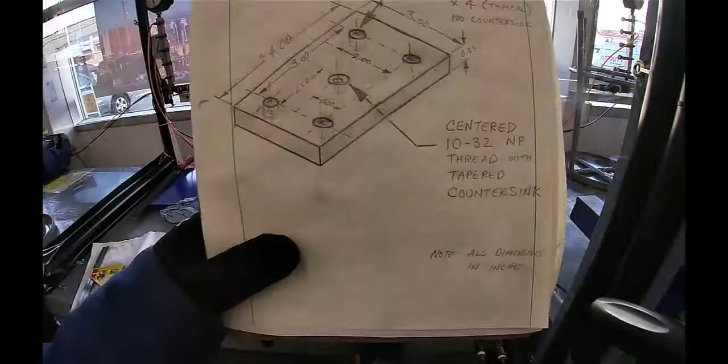Our little tap and drill project, which is right here. You can get a copy of that on the Learning Hub, and it's got some dimensions on there. One thing I wanted to point out on the dimensions over here is that this one right here where it says 4 inches, that's approximately 4 inches. Yours might not be exactly 4 inches when you get it. So unless you got a metal stretcher and it's less than 4 inches, you might have to do some calculation

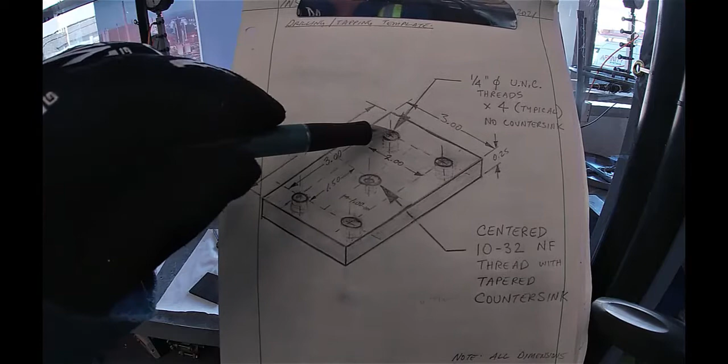on here. But the center holes, this is going to be centered right on that 4 inches over here. And these ones over here, there's going to be 3 inch from center to center for these bigger holes right here, here, and here. 3 inches center to center this way, and 2 inches this way.

Is that the red? Yeah. Alright, so we've got our piece ready. We're going to put a little bit of bluing paint on it. We're just going to put a light coat of bluing paint. Now, are we going to be okay painting onto that in the vise? Probably not, eh? Let's do it on a piece of paper.

Okay, so now Ray's getting ready to make his scribe marks onto our piece that we're going to be drilling and tapping. Alright, so he's got a dimension on the caliper on there. Yep. So we're going to try and get 0.459 on our caliper. 0.459 inches. Right. So right now we got 0.458. Looks pretty good. And then we're going to go scribe that onto right there somewhere.

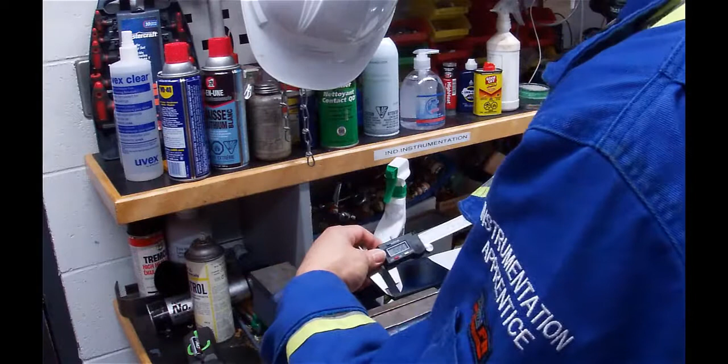I don't know if I can zoom. There we go. Okay, that's not too bad for a zoom. We'll do the same for this corner, because that's the same. And then same for this one. How come it stopped? Okay, there we go. No, it's good. It's still good. The time's still ticking. Okay. One more here.

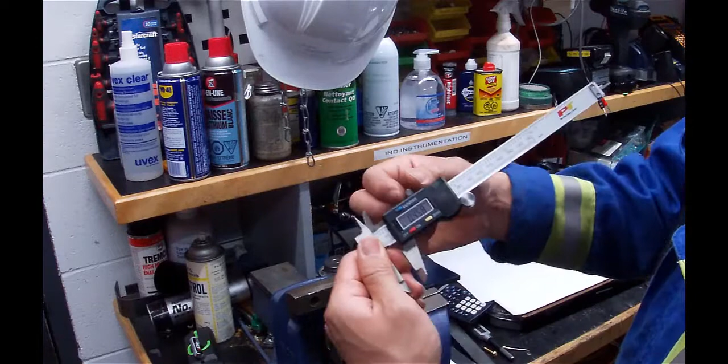Okay. All right. And we're going to set this other one up for 49. We got to unlock it here. And we're going to go to 0.4965. Oh, missed it. 49. Okay. There we go. Bang on. Look at that. Lock it in. Fancy schmancy. Lock the second mark.

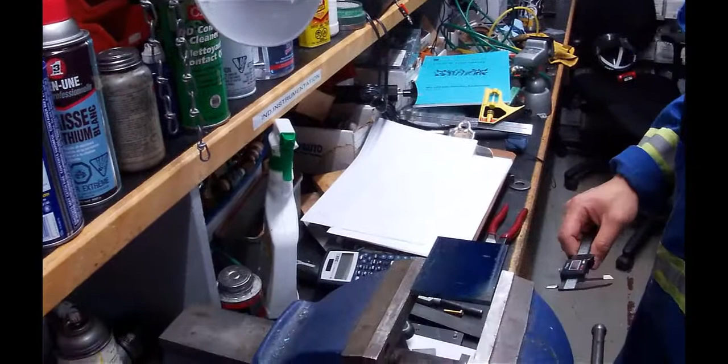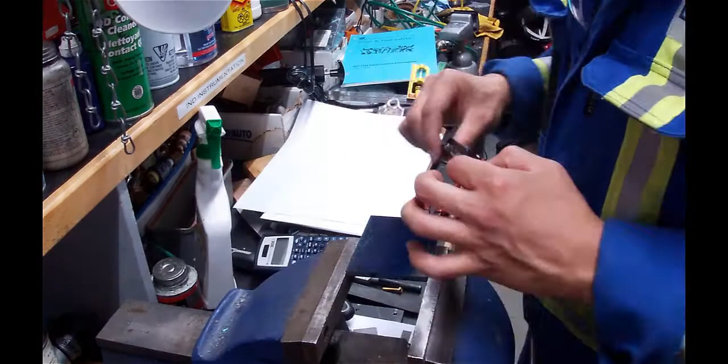So that's where our... now once we get that, center punch it. Got a straight edge? Actually, yeah, I can straight edge. Maybe use a straight. It's gonna be hard to get the exact measurement of this, because my vernier caliper is kind of on an angle. You know what I mean? Well, can I make a suggestion? Yep. All right. No, I think that's good. 496 right there. Okay. Double check it with our caliper. That's right.

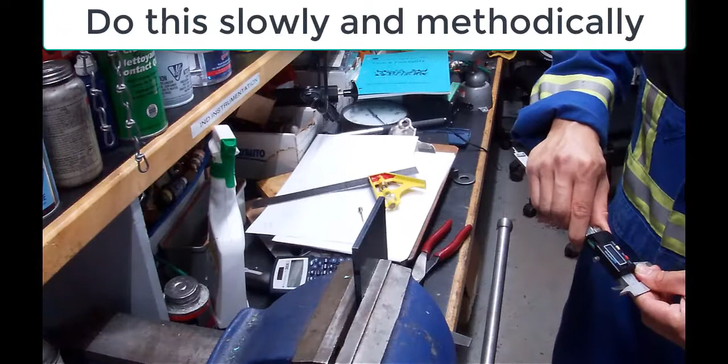That's too much. Lock it in. Yep, pretty much. It's good. Oh yeah, measure twice, cut once, right? Stick our square on there. Yeah, ready. First scribe of the day. Beautiful. Oh, look at that. It looks very good. Maybe you can do that to the other ones as well, right? Let's do it again. One more time. Yeah, make sure it's nice and visible. Yes.

Look at that. What a line. Beautiful. That is the best scribe I've seen today. Yes, look at that line. I know. Nice and visible. Very. So I guess you got a good mark on that thing now. So now we're going to flip it around and then do the same thing on this side.

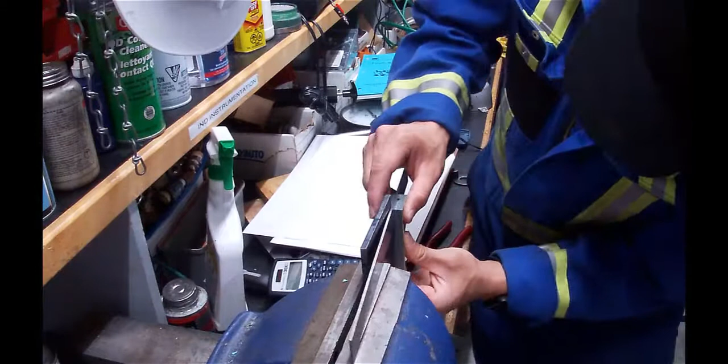Getting on. So now we're going to do our second scribe. If I hold it. Just try to help you hold the other end without putting too much pressure on it. Okay, ready. Look at that. Oh, that's beautiful. That looks good. 2 scribe marks. It doesn't look even, but it looks okay. Yeah, that looks okay. You could measure it, right? We could test it later, but maybe keep making your marks.

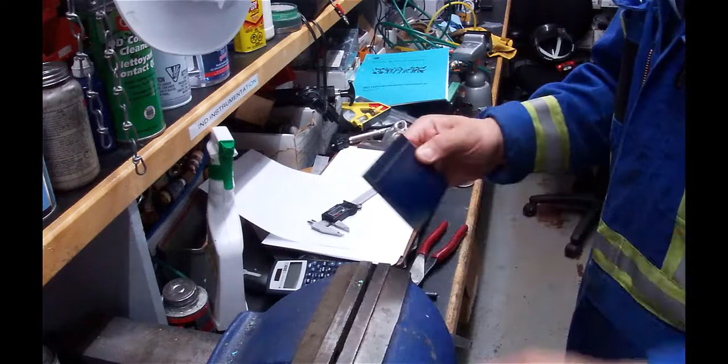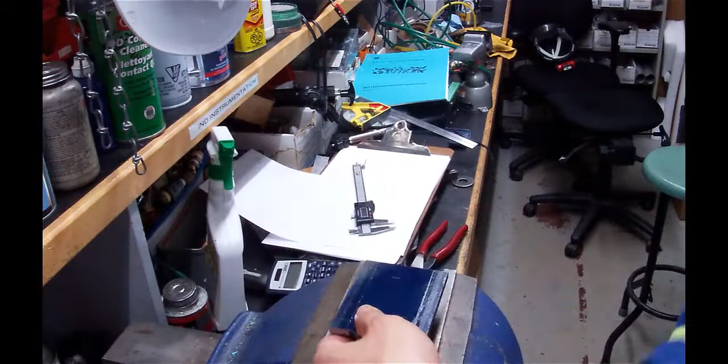How's it looking there? Pretty good. Wow. Getting our 4th scribe mark, and then we're ready. All right, then we can start. Then you're gonna do like the center point as well, right? Yes. We're gonna go to the center punch after that. So now we've got those lines lined up. I won't even use a square, so I'm not sure if it's actually square. So put it back in the vise. Four marks.

There we go. Scribe. Just double check this one here. So we're gonna go 0.4965. This marker here. Looks good. This mark that's touched.

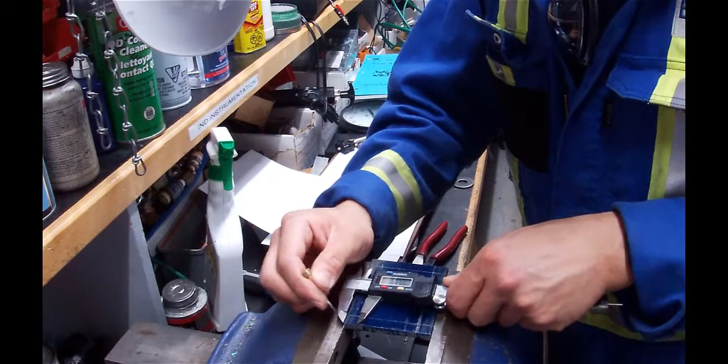Okay, so the only thing we're missing for a mark on there is our center point. So if this was 3 inches this way and 2 inches that way, where would the center line be between those 2 points? I guess you could take a line and scribe a line going from point to point this way and point to point that way, figure out where the intersection is, and then measure, and it should be halfway between here and here, and also halfway, in theory, right?

Yeah. So that should be 3 inches, right? That 3 inches? Slightly bigger, 3 point. Okay. Three point 3.01. 3.01. That's within like 100th of an inch. That's not too bad. Okay, so 2.001. Slightly off. Good thing we're double checking.

Well, remember that one of those lines is out, right? Did you measure to the right line? It's out by a difference of about a millimeter, because I made two etches on this side right over here. Do you see that? Yeah. Right. So you maybe want to make sure you got it on the right line. Where's your other one? No, this one's 2 bang on.

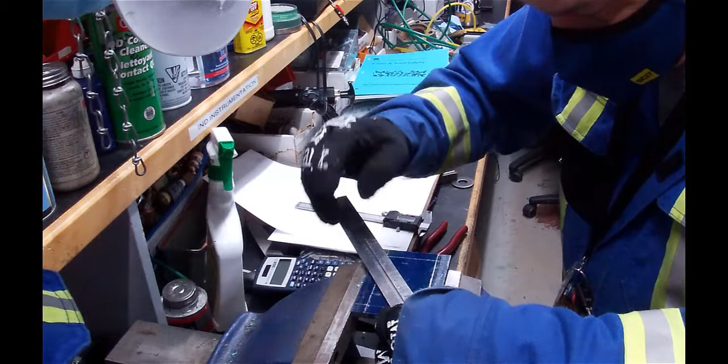The top one. Yeah, that one. Yep. Excuse me. Top to you, bottom to me. Bottom to me, top to you. Does that look good? Yeah, that's good. That's perfect.

All right, so now I've got a point right there. We should be able to measure that, and it should be 1 inch between there and there, and 1 inch between there and there, and then 2 inches, or no, inch and a half. Inch and a half, sorry. And that way we know that we're at center. I think I'm on the right line there. Does that look good to you?

About an inch. Okay, let's see. Oh, it's 0.9. I can see. So that's about 0.979 right there. Yep. Okay, and then this one right here. Which also, it's not quite. Nope. Not quite. Okay, so there's 0.99 between that line there. Oh, see, I think it's out. It is out.

Okay. Well, it's a good thing that we're only scribing so far, because that's really, really bad. You'd have been out by a whole millimeter. So, I think it's this. That's what it is. Probably the thickness of the scribe. It's out by, what was it, 0.0. Okay, you see the second mark that I've got in there? Okay. So I'm going to measure to that.

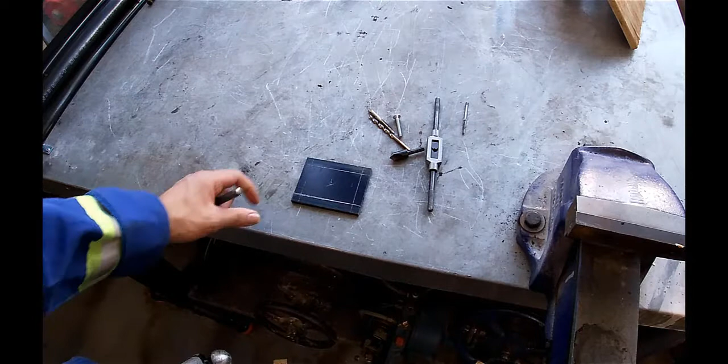So we're going to center punch this now. This is a center punch right here. We're going to take a ball peen hammer. So make sure you eyeball it really, really close first, right? Make sure that the point is right on the intersection, because you don't get a second chance with this. And hit it nice and clean and square, right?

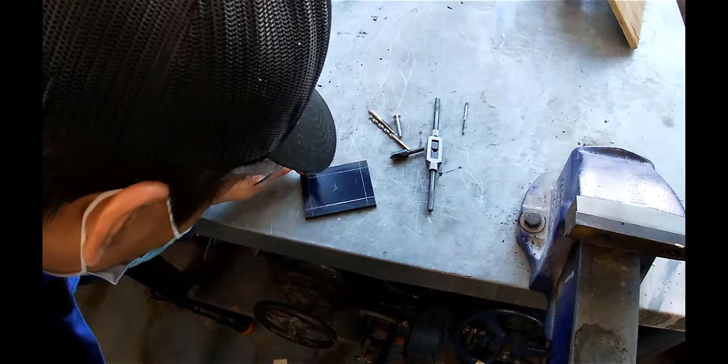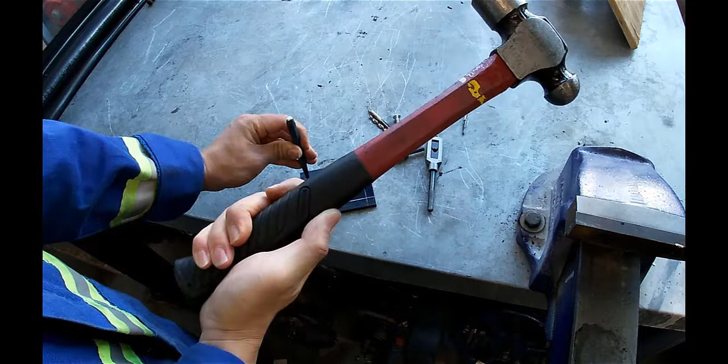Don't just go tap, tap. One tap, and done, right? You got a good solid ball peen hammer, which is the right tool, not a carpenter kind of hammer. And yeah, give it a good smack, right? Ready? Watch your fingers, of course. There, that's good. What's bad is if somebody goes tap, tap, tap, because then you make a whole bunch of holes in it, right? Okay, that looks good. All right, so let's do the other 4.

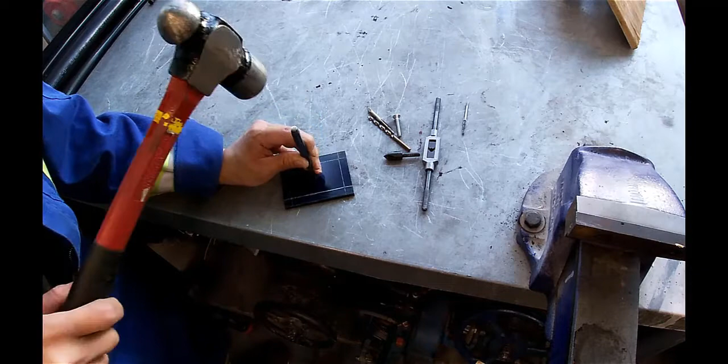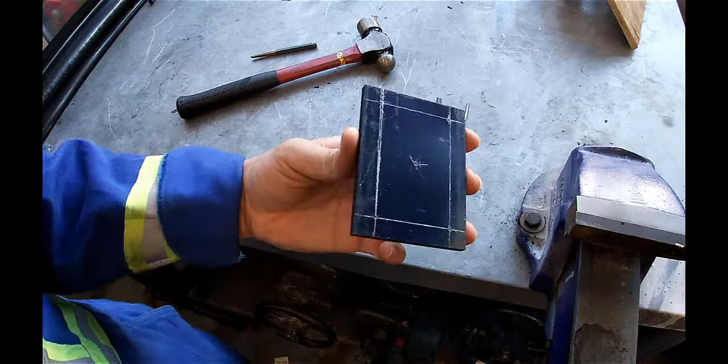Center one too while you're at it. We do that one. There we go. Okay, that looks really good. So, I guess now you can start drilling, eh? So, what size holes do you need? You need like 7/16. You went and looked at the index, right? And you figured out for the 1/4 inch NC you needed a 7/16 drill bit.

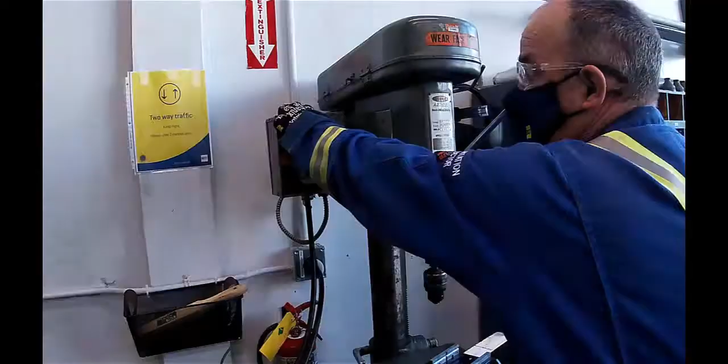Okay, first thing we're going to do is plug it in. It's one of these fancy little sockets on here. Comes in over here. And then once you put it into the socket, you give it a little twist, and then it shouldn't pull out. Okay, that's good. Now, we're going to put a bit into the chuck, but before I put a bit into the chuck, I'm actually going to pull the plug out because I don't want to take that chance, right?

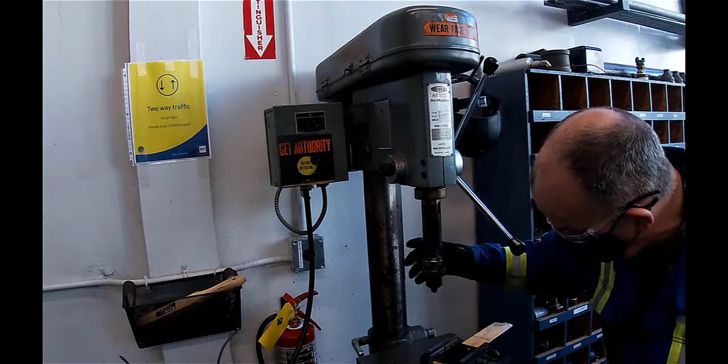Okay, so what bits do I need? We need a 7/16 for the first one, right? 7/32. But are we going to start with a 7/32? Don't we want to have a smaller bit as a pilot hole? We want to drill a pilot hole, so we have a smaller bit. Where's our chuck key? Oh, it's right here.

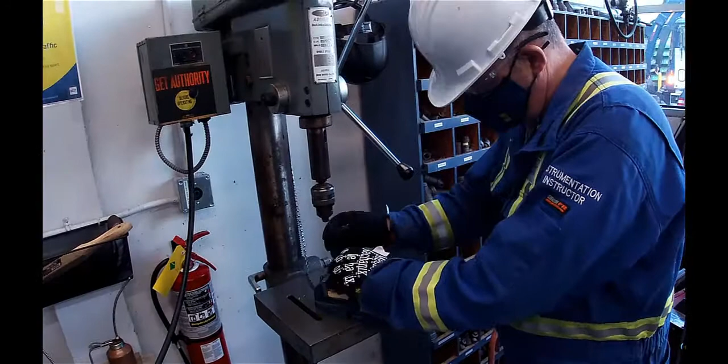And here's our chuck. Putting that bit on there. Spin it around a little bit before I tighten it up. Make sure that it's in straight. Grab my chuck key. Notice it's not plugged in, so I don't get into trouble here. Okay. So now, that looks pretty good. Am I at the right height? Am I going to be able to get all the way through my piece with this setting? That looks pretty good.

So what we need to do now is line it up. Now, what did you say? It was the one on the right, right? This now would be on your left. The one on the left, if you're looking at it this way now. Okay, the one on my left. On your left. Okay. Yep, no.

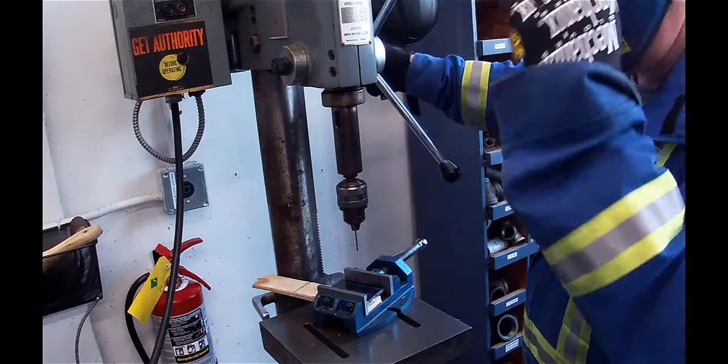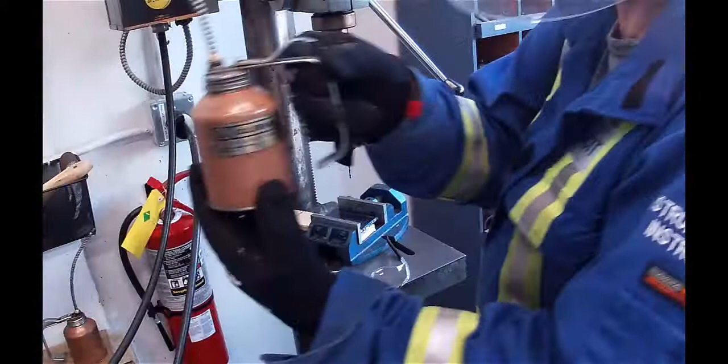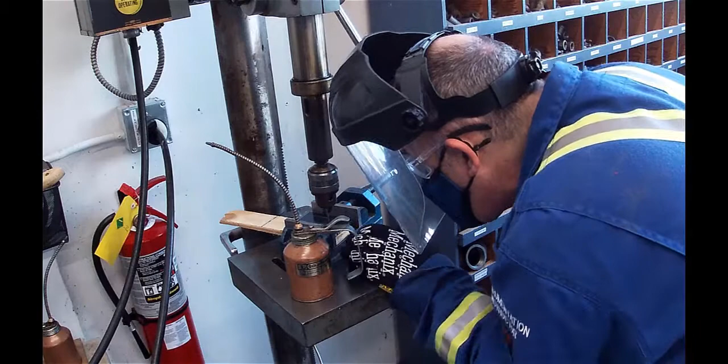Okay, so I'm going to plug this in. Plug it in like this. Got my cutting oil, right? Cutting oil. Okay, safety glasses. I'm going to put them on right here. And now, how do I turn this thing on? I have to make sure first of all that I'm still lined up. The nice thing about the center punch idea that we just did: if you drill a hole without doing a center punch, it's not going to go in the right spot. And like Ray was saying earlier, measure twice, cut once, right? Yes, always.

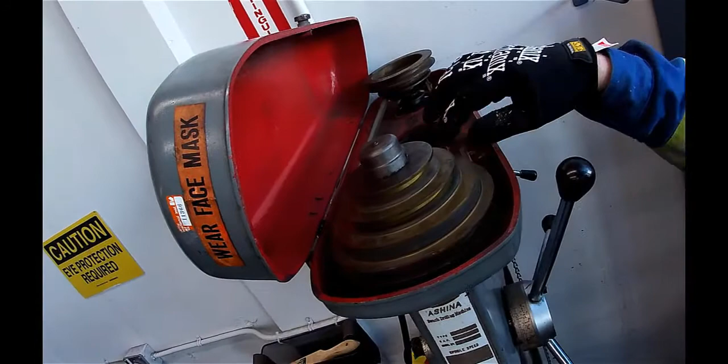I'm just going to put a little bit of oil on there. It's probably a little bit too much oil. And here we go, start. Looks like we've got about the right speed in there. Maybe we should show the folks at home. How do you change the speed on here? Again, always unplug it before you do that. Right up here. If I wanted to go faster, for instance, I would move this belt up here like this, all the way to the top, and then this belt over here to the top as well.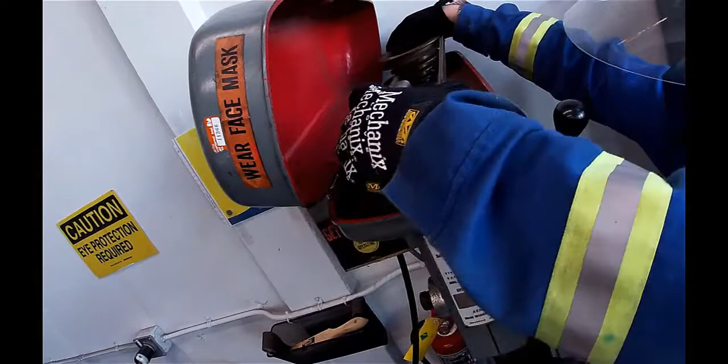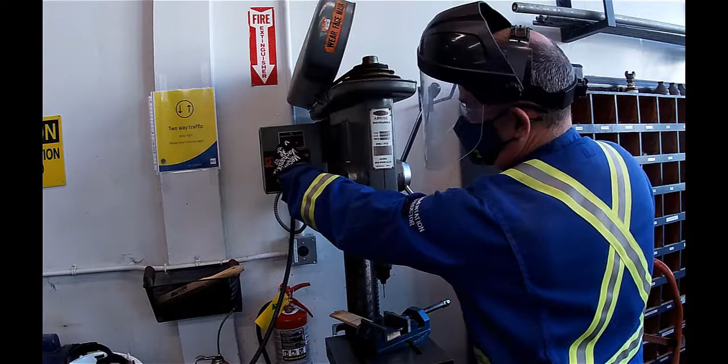How does that make it faster? For probably every one revolution on this side, it's going to spin 4 times on this side over here, or maybe it's 2 to 1. I don't know, I'd have to do the math. So let's just check that out. Is it going to go faster or slower? It's not going to go very fast at all until I plug it in. Alright, so now, with this guard down, let's take a look. You can see it's going a lot faster. Okay, so I'm going to put it back. I don't want to go that fast.

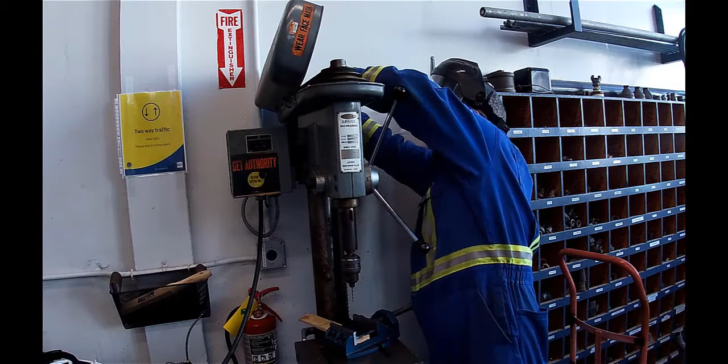Why did I put the guard down before I turned it on? Because what happens if that belt broke off right then and there? It probably would have smacked me in the head. Again, I'm just going to put the belt back. You don't have to take the belt right off to do this. Just go one pulley at a time. And then it goes back onto here. Let's go one at a time. Dummy. There we go. Sometimes it takes a minute. Okay, that looks pretty good. The belt's on both sides. The belt condition seems to be okay.

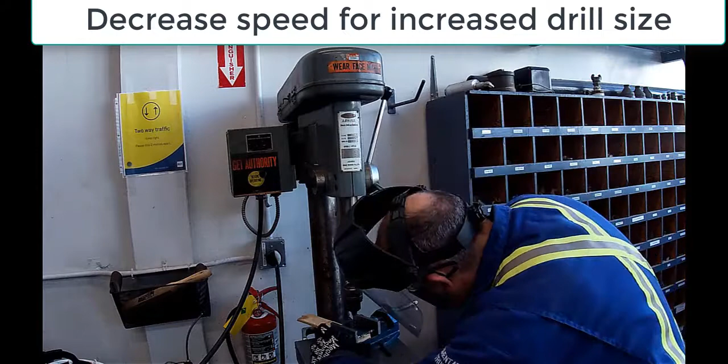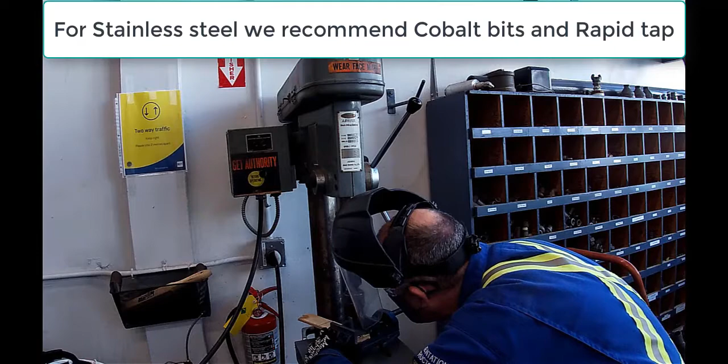So now I should be able to start it. And it's not going too fast. See, if it's going too fast, I'll probably break the bit, and I don't want to do that because then I'll be here all day. Okay, we go in kind of slow. I don't want to go too fast. Let the drill bit do the work, right?

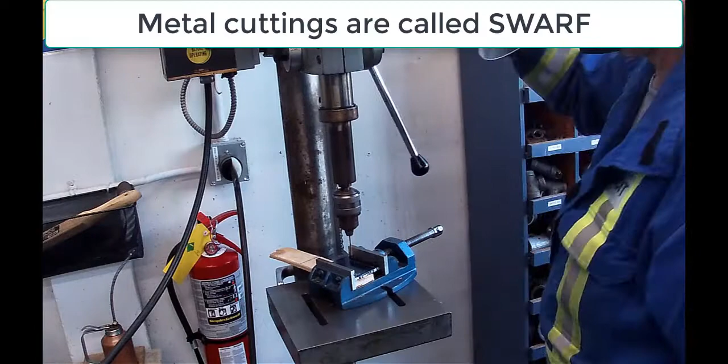I know I'm through when all of a sudden wood chips start coming up. There we go. See, I'm all the way through. You can see wood chips on it. All right, I'm going to stop it. See if I can clean that up a little bit. And that looks pretty good. I'm just tightening this a little bit. There you go.

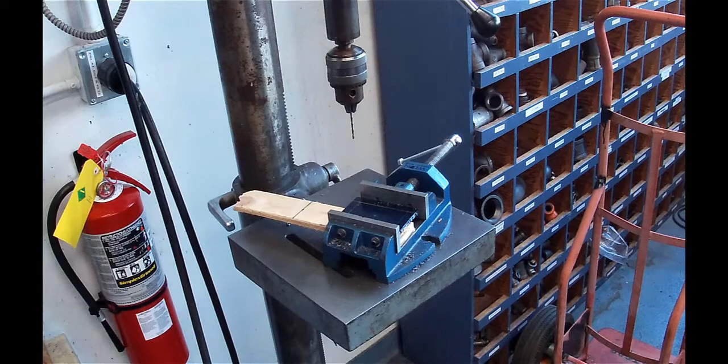Okay, so you got your own fancy face shield. Yeah, I forgot I had these ones. Those are better. Yeah, that one is pretty scratched. What's the matter? You don't like the way the platform is set up? It's a little bit low. Wow, I like it a bit high. Well, I am shorter than you. I'm closer to the ground. Yeah, I got it.

Okay, it's recording. Alright, so we're on our third hole. Aimed. Gonna give it some cutting oil. Hit the start button.

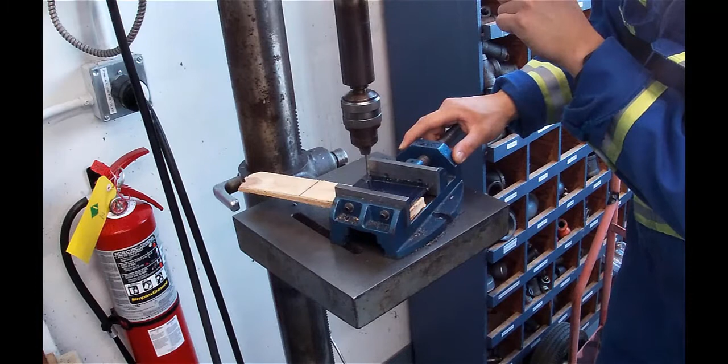Is there a special name for these little pieces that come out? I can't remember. Oh, there is a name. Filings? No, it's not filings. There's a fancy name. You know what? Well, whatever those cutouts are, we try to keep them under an inch. Yeah, okay.

A little bit more cutting oil. Okay, now I gotta look. Yeah, there's a funny name for it. I can't remember. I know there's a funny name for it. What to call the curly stuff that comes out when drilling a hole? There we go. We are all done.

To the next drill bit size. Yeah, so go to the next drill bit size. So we're going to unplug again, power off, loosen our chuck. I know there's a word for it, so I'm finding it.

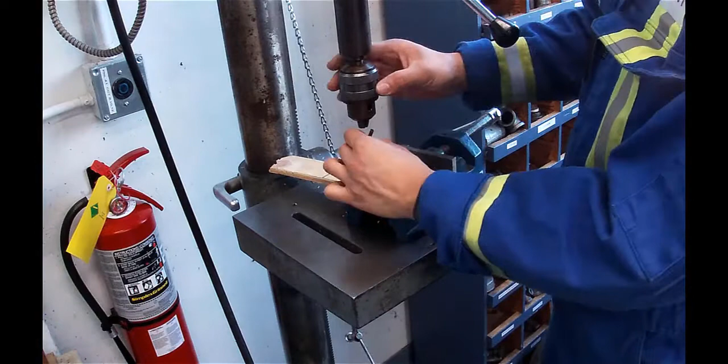You're offline. It's saying I'm offline. Okay, hang on. Hey Google, what do you call the things that come out when you're drilling a hole? Still doesn't do it. We suck. Alright.

Tighten the chuck back up. This is our 7/32 drill bit. I'm going to go with our first hole, line it up, put some oil, and plug back in. Hit the start. There we go, that's one. Stop.

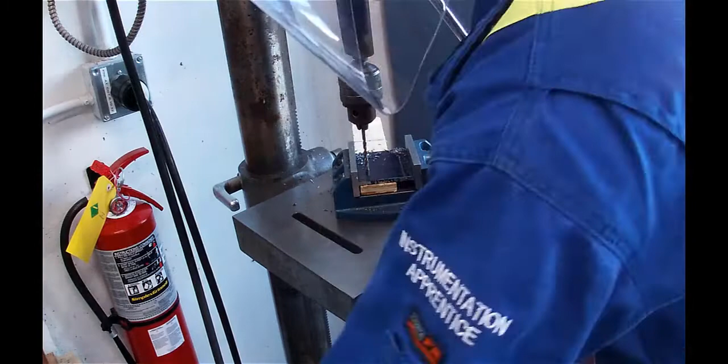Line up our second hole. Oil. Start. Stop. Line up our third hole. Oil the bit. Start.

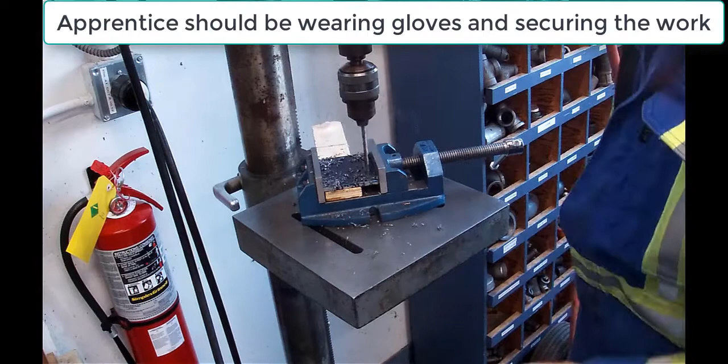Done. Stop. And our fourth and last hole. We're going to line it up. Bang on. Oil. Start. Lift the bit off of there. And we're done. Look at that. So, let's clean up our little mess and we're on to tapping.

Awesome. We're recording right now? Okay, so yeah, you're recording.

So look, always clean up your mess, folks. Right? And don't use your hands when you're cleaning this up. Definitely use this little brush. Don't even use a glove, because all those little pieces, those little swarfs, they're going to stick in your hand and cause you to have a metal sliver, which is never fun. All right? So we're going to power off. So we're done drilling for now.

I guess you're going to change the bit, right? Yeah. We need to drill that center hole actually. Okay. The center has already been punched though. Yes.

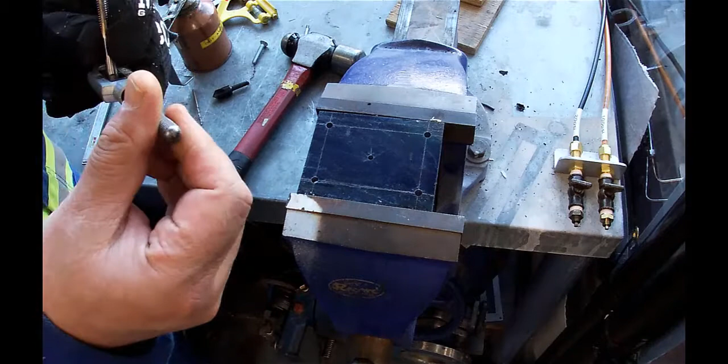All right, so we've got our tapping wrench over here. I'm going to put our tap, so this is going to be our 1/4 inch tap right here. This one's a tapered tap. You can see that it's got a taper on it. It gets started right there, and then by the time you get through here, you've got a full thread going through. So the idea here is we're going to try to take this all the way through the hole.

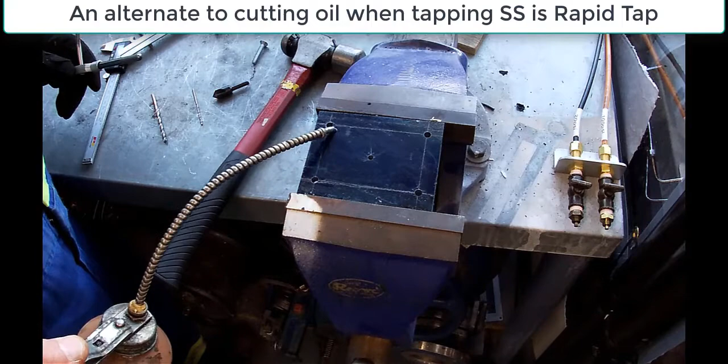Okay, so the first thing we're going to do is put a little bit of oil on there. I'm going to put my gloves on because I don't want to get any stuff on me. And then when I stick it in, make sure that it's up and down. And just go nice and slow, go half a turn, go back a 1/4. Get those swarfs out of there.

And after a while you start feeling that you're actually making some thread. It'll be a little bit harder to turn. Go make a half a turn, go back a 1/4. The idea for that is to break off the swarfs that are being built up. I'm also going to put a little bit of oil right in there. A little bit of oil helps lubricate and cool as you're tapping, because it can get a little hot. You're making some friction in there.

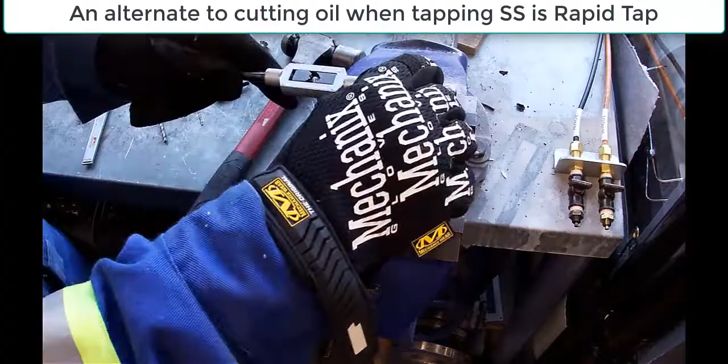Some people just use a drill for this. I don't recommend that, especially when you're going through thicker steel like this one right here. It's a 1/4 inch steel. It's very easy to break these taps. Very, very easy to break them. Okay. Oop. Looks like I should tighten that up a little bit.

I can feel like I've got through part of the way, but part of the tapered part of the thread is still working its way through the piece. And once I get all the way through, it'll be a lot easier to thread. Won't feel hardly any pressure at all. Almost through. Okay, I'm all the way through. So I'm just going to screw the tap all the way through, make sure that the threads are nice and clean, and then I'll back it out.

All right. That was easy, eh? Oh yeah, piece of cake, right? Oh yeah. Should be.

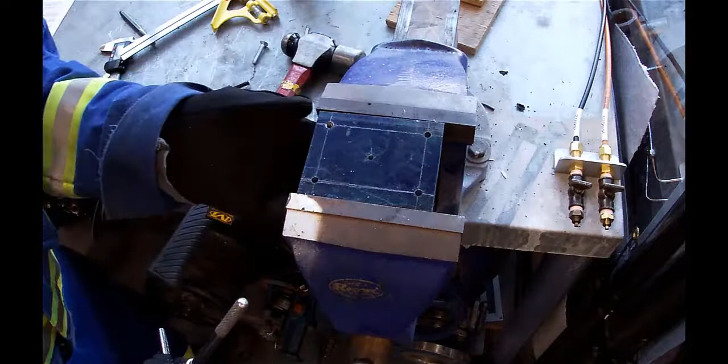All right, and it's nice and clean. Okay, take a look at that. Oops, that wasn't very smart. There we go. Making sure that it's nice and clean. Put it back in. Put a little bit of oil on it again. And start another hole. Okay, again. Go nice and slow at first, just to make sure that you don't start off where it's wrong. And because it's tapered, it'll find its way in.

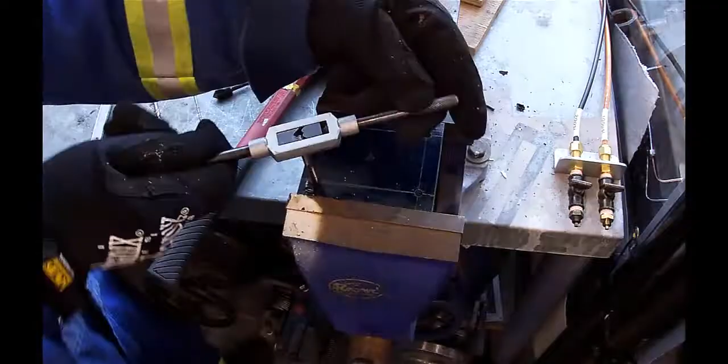Okay. It's not liking that. A little bit of oil. Oil is your friend. Half a turn, 1/4 back. Yeah, about that. Half a turn, 1/4 back. That's right. So it seems like it's taken a long time. It's because you should be taking your time doing this.

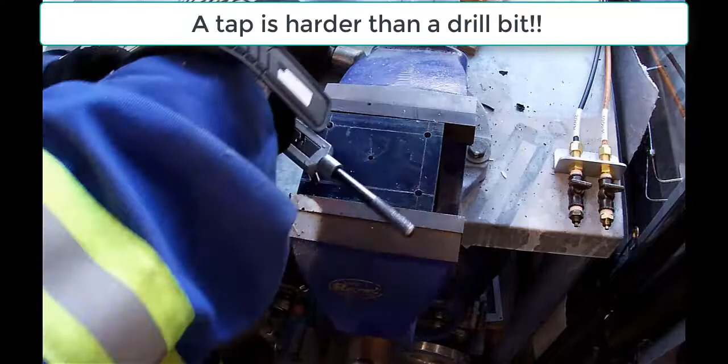One of the bad things that could happen if you go too fast is you could break this. And if you broke one of these taps off halfway through the thread, good luck getting it out. You might as well just start over and get a new piece, because they're hard. Okay, there we go. And they're hard, so you try drilling that out after it's broke off in there, good luck. You have to go to the next size up. Yeah, well, I don't know if you'd ever get it out. It's pretty hard to drill.

Okay, so that looks pretty good. I'd blow it, but I got a mask on. Okay, good. Look at that. Put it up, take me in. Yeah, there you go.

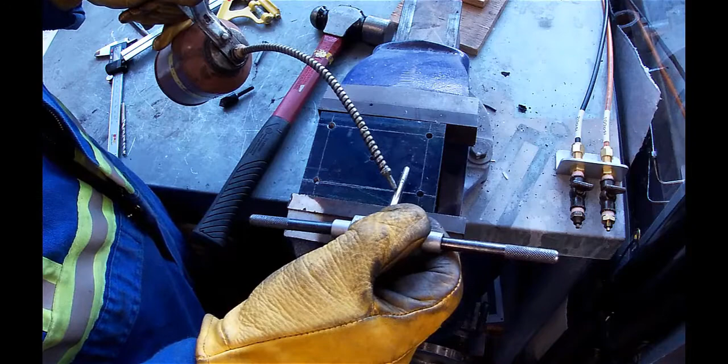Okay, we're going to tap out our third and fourth holes. Oil the bit a bit. And again, it's tapered, so to get started, you can kind of hear the cracks when you go back a quarter turn.

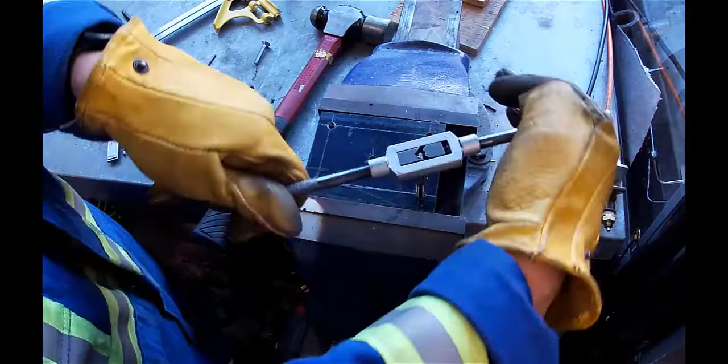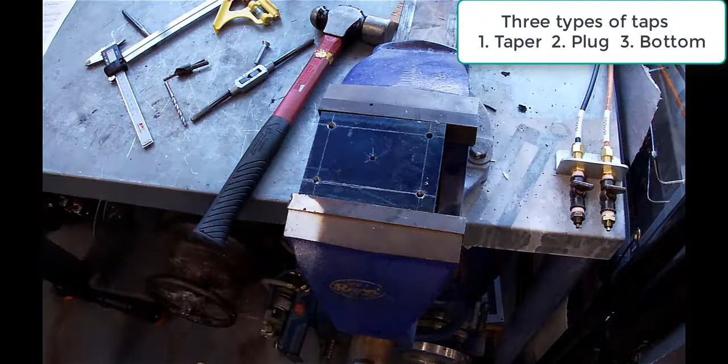There we go, pretty much all the way through. Back out. If this was a blind hole, in other words, a hole that was part way into the metal but not all the way through, what you would do is start the thread with what he has right there. You would only go down a certain distance, maybe about 4 or 5 threads, and then you'd take out the bottoming tap, and then you'd use that to finish the job.

We're just going to clean the threads here. That's what they mean by a blind hole, a hole that doesn't go all the way through the metal. Right? Sort of like a little cave as opposed to a tunnel. Yeah. Okay, so now we're going to do our fourth hole, re-oil.

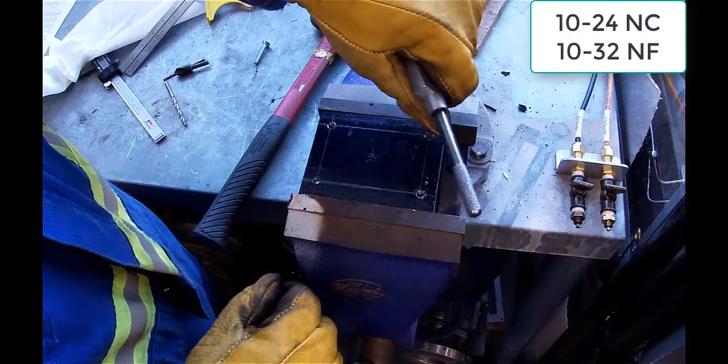Spin it all the way through, clean up the threads on the way back out, and then we have our fourth hole nicely tapped. So now you just have the 10-32 tap to do in the middle? Yes, and right after that we're going to put a countersink into it. Tapered countersink.

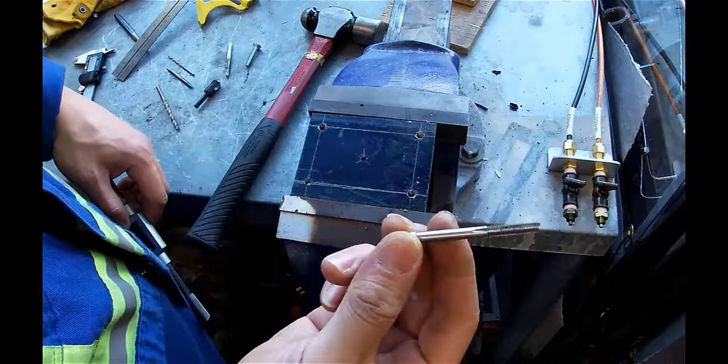So this is a... I think it was 10-32, wasn't it? This is a 10-24. Oh. Well, we wanted a 10-32. You want me to go get you one? The tap. 10-32 tap? Okay, I'll go. So for our center hole, we're using a 10-32 tap.

This one looks like a tap, is that? That's a bottoming tap, isn't it? That's actually, yes, it's a bottoming tap. Do we not have a 10-32 taper? Let me go get a taper. You don't want to start with a bottoming tap. It's going to be too hard to line it up. Maybe pause it and we'll be right back.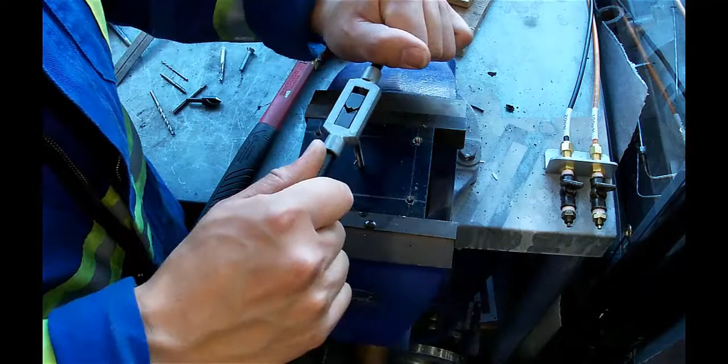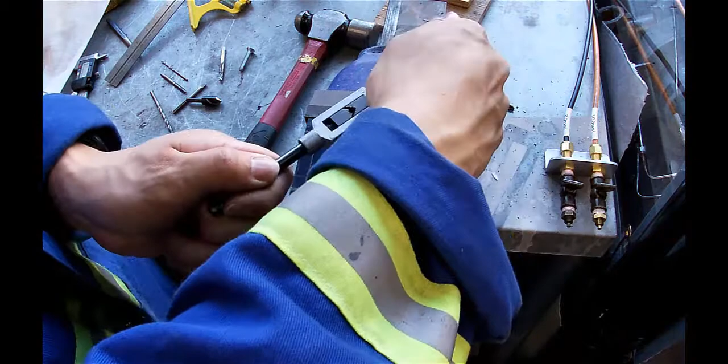So we're going to get back at it on our fifth hole. This is a tapered tap, 10-32. And just going to oil it up. Make sure it's nice and perpendicular.

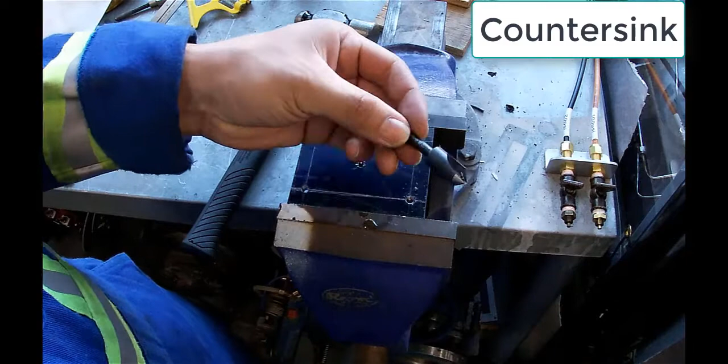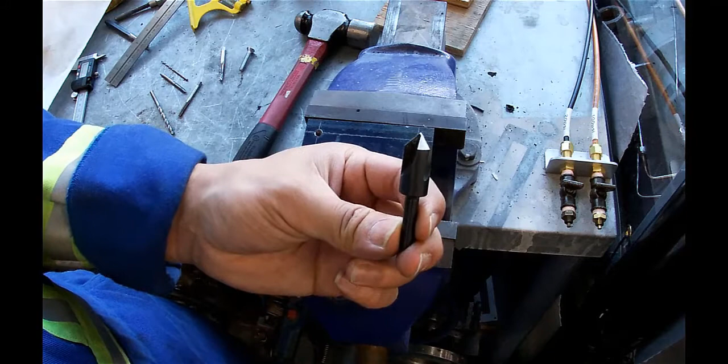And then go all the way through again. Beautiful. And then back out. Okay, and the last thing we need to do is put in that piece right there. Basically, this is going to be a countersink, tapered countersink right there, right? Yep, this is the tapered countersink. Drill press and just go down a little bit of a ways in there, and you should be good. Yep, we'll grab a screw and test it out.

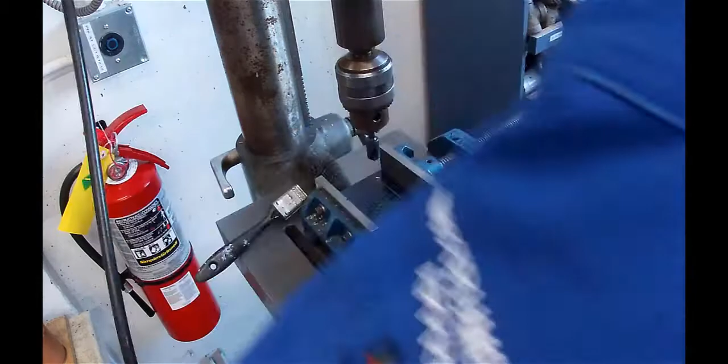So we're back on our drill press. We got the countersink in there. We got a flathead screw, which has a little bit of a taper before it gets to the threads. So we're gonna use the countersink to basically shave off a bit of the surface of that metal piece. And then this would sit flush right to the surface. Let's do it. So, I'm gonna plug our drill press back in.

All right, hit start. Add a tiny bit of oil. Nope, not that one. Add a tiny bit of oil here. So in this case, we don't know exactly how deep we have to go. So less is more here. We're gonna stop the drill press and try it out. Grab our screwdriver. This is a number 2 Red Robertson. Try and screw it down.

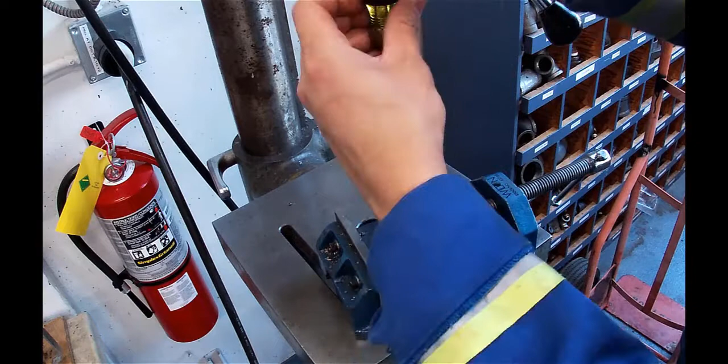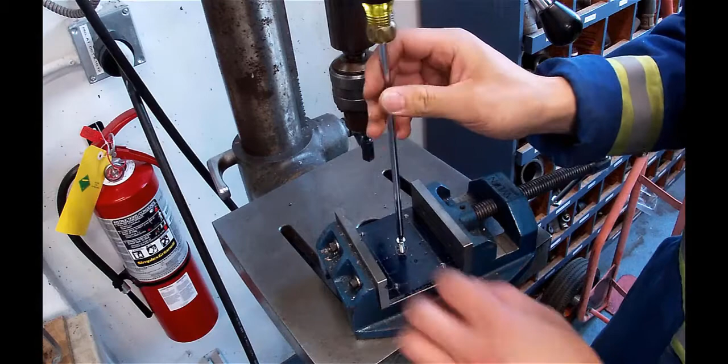So it's not yet sitting flush, so we're gonna countersink it a little bit more. Bring it back over here, line it up, hit start. Try again. Still not quite flush, so back out. Back on the press, line it up, start.

Might do it this time. We'll hit stop. I'm gonna brush it off a bit. Looks good. It looks pretty good this time. Let's try it out. So let's enter the screw. So you're trying to get it flush. We're gonna try and get this flush with the screw and the surface. That is the whole point of this drill.

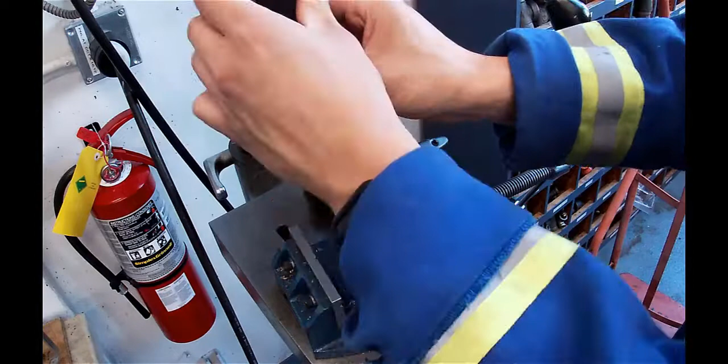Here we go. I think it's right on now. Is it flush? Still feel a little lip. Do a little more. Well, if you want to do one more. This is your new template. That's true. It's got to be perfect. That is true. All right. This has got to be it. Let's see what happens here. All right, screw going back in. There we go, nice and flush. Check that out, John.